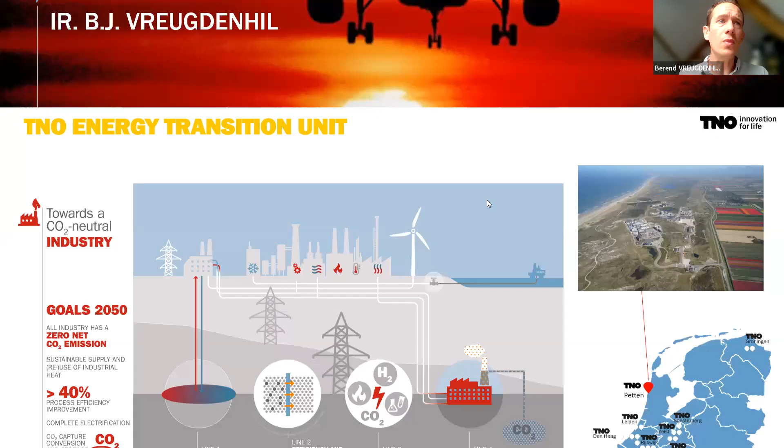One slide about TNO. TNO is a very large research organization, the largest in the Netherlands, focusing on many topics.

My group is part of the energy transition unit, where we focus on a CO2 neutral industry via various lines within my group, which is located in Petten.

Within the flower fields, we focus on using biomass to replace fossil resources. And this can be in the form of heat, fuels, and chemicals.

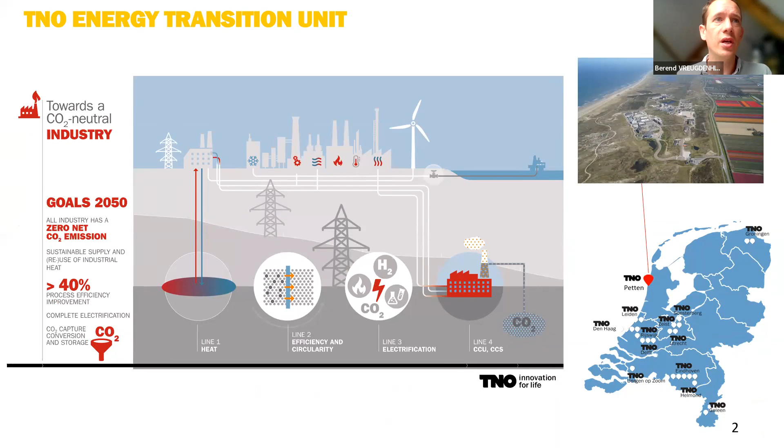So, as I said, the topic of today is gasification towards Fischer Tropsch. Gasification is, I believe, a workhorse for the energy transition.

IEA Bioenergy published a report end of last year where we investigated how gasification can be applied in existing infrastructures, so existing industries, to convert them into biorefineries, utilizing their own waste streams and co-producing additional products.

One of the proposed pathways there is a Fischer Tropsch pathway. It's a key technology in utilizing all kinds of undervalued resources.

From agricultural waste and forest residues to municipal solid waste and even to plastics, it can be applied in many different industries: power generation, refinery, steel making, but also for fuels and chemicals.

We believe that gasification is a crucial technology in reaching large shares of green gas in the European gas infrastructure, which is really a hot topic today.

As a technology, it can also be deployed for developing the bioeconomy, where you focus on using biomass to produce fuels, chemicals, energy, but also the circular economy.

When you talk about municipal solid waste, you take in plastics, and gasification allows you to convert plastics back into the building blocks of plastics, so you can make virgin plastics again.

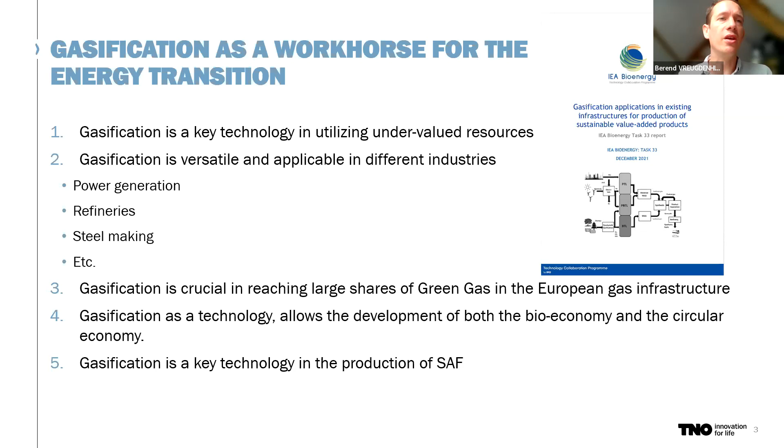Making all these sectors renewable or sustainable presents a huge challenge, especially in hard-to-abate sectors like aviation. It's very difficult to supply SAF in substantial quantities.

They evaluated the various routes and compared biomass pathways to power-to-X, using renewable energy, and compared it to fossil-based products. It's a very nice report, but what it states is...

E-based systems tend to be 2.5 times more expensive compared to bio-based routes.

So making all these products from power-to-X is going to be very costly, and the sustainable electricity is not yet there. That's a huge challenge.

It also mentioned that if you want to make renewable kerosene via the power-to-jet pathway, you would require 1,010 terawatt hours by 2050 and 143 million tons of CO2, which is also a substantial amount.

The good thing is, in biomass, you have both a lot of carbon and a lot of hydrogen. So it's an excellent pathway to go to Fischer Tropsch.

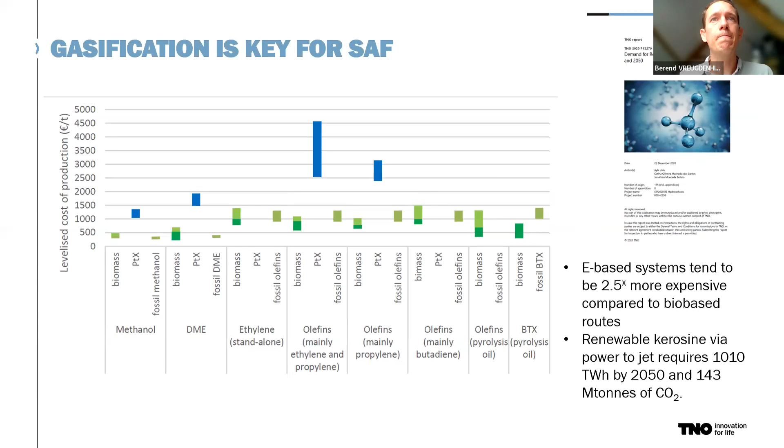So going into the project, what I will be presenting is part of the BECOOL project. It's a collaborative project between the EU and Brazil, ending at the end of this month.

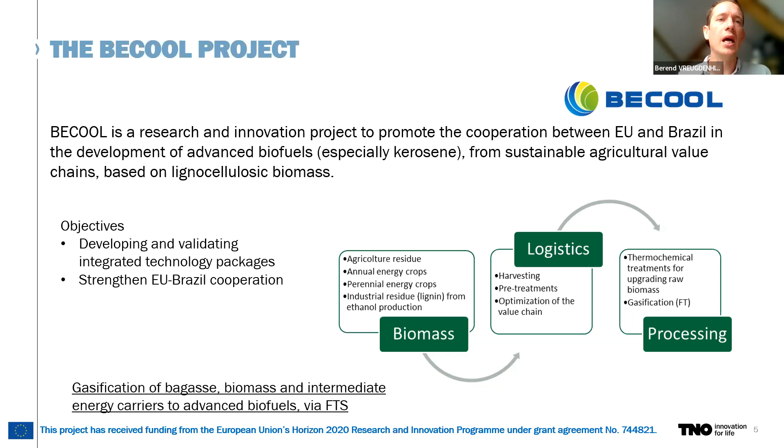Basically what we looked at in this project with all the partners is the growth and cultivation of biomass, the harvesting, the logistics to get the feedstock to a plant, and then the thermochemical conversion via pyrolysis or gasification to go to Fischer Tropsch. We analyzed this with models, but also supported it with actual testing in the fields and in the lab with gasification tests. TNO was part of the group looking into this thermochemical conversion, where we showed that you can convert biomass into Fischer Tropsch products, and the results were used to validate our models.

So what did we do there? We had several routes in the project: pyrolysis producing a liquid, and then high temperature gasification to produce syngas. But at TNO, we have an indirect gasifier, which is more medium temperature gasification, and we focus on utilizing the biomass directly, making a product gas, not a syngas. It's rich in tar and methane.

After removal of impurities with tar removal or a water wash and hydrodesulfurization, we would go to a steam methane reformer to make syngas out of the product gas, remove the CO2, and go to Fischer Tropsch where we produce the liquids. The economics, as calculated by IEA back in 2019, would be between 21 to 40 euros per gigajoule. And our approach reached the high end of that specific range, and that's without any learnings so far.

Looking into the mass and energy balance, the overall efficiency is about 45%, and the carbon conversion is 34%. This is quite typical for Fischer Tropsch processes.

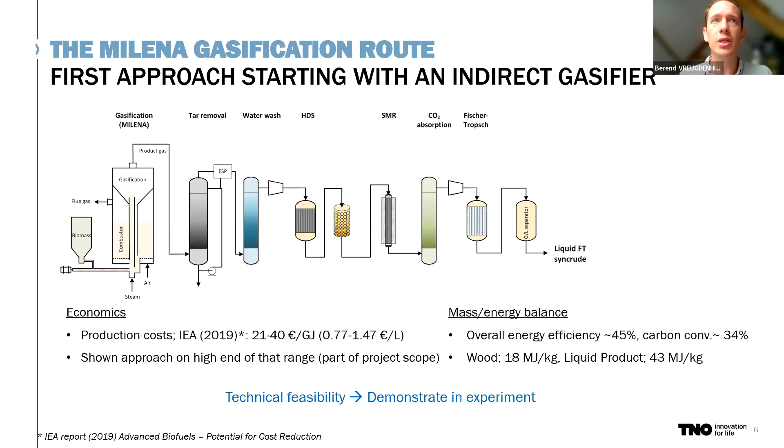So what we did is we demonstrated with experimental work that it's feasible, that it's possible to do this, and it's actually quite unique. I'll show you the lineup that we have. Part of it was existing equipment, so the gasification and the gas cleaning and part of the gas upgrading, but everything from the steam methane reformer onward

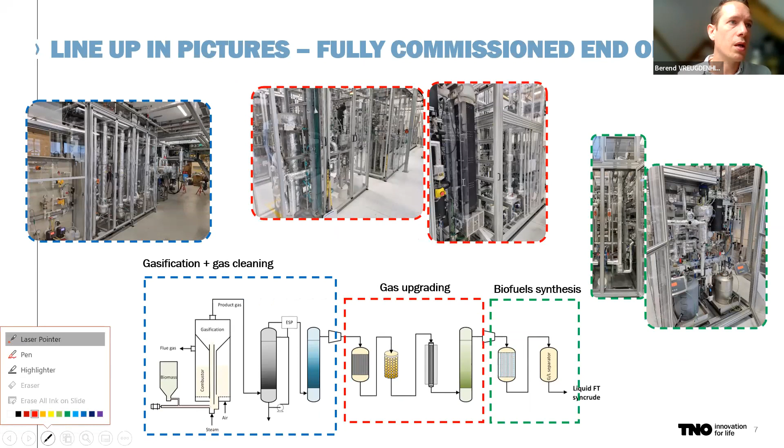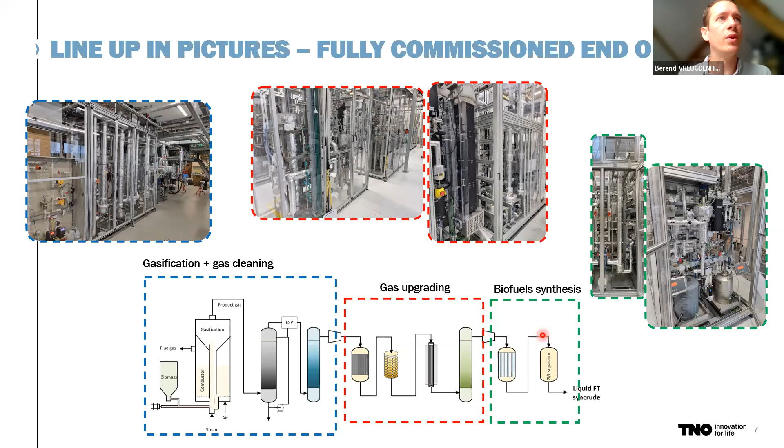from this point forward, the CO2 scrubber and the high pressure fuel synthesis, that was all newly built and fully commissioned by the end of 2021. So it wasn't tested before. Within the BECOOL project, we actually had 2 weeks of running an experiment to demonstrate this.

With quite a big team of people, we gasified first beechwood, which is our standard starting point. We operated the gasifier, and in the meantime prepared the upgrading, so the cleaning and the conversion, the steam methane reforming, CO2 scrubber, in order to get a syngas of good enough quality. At the same time, we were starting up our fuel synthesis part with gas from the grid, and eventually connected it to our gasifier, so on bio-syngas, and demonstrated the feasibility.

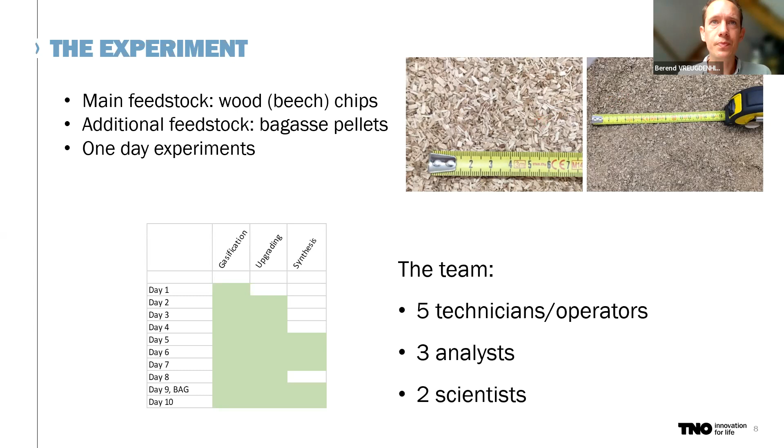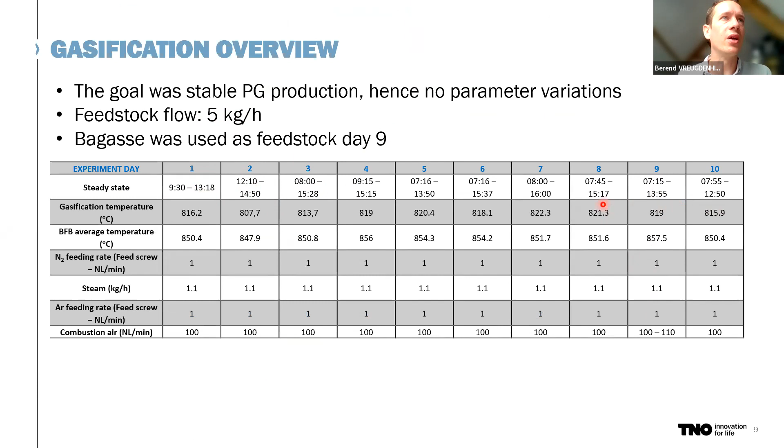Here you have an overview of what we were doing. You see some days were longer, some days were shorter. Sometimes you run into problems and you have to solve those. Typically, every day we operated on 5 kilograms per hour, and on the 9th day we ran on bagasse pellets. Our gasification temperature is roughly around 820 degrees C, and we tried to keep everything constant for the duration of the 2 weeks.

So this is some of the results on gas upgrading. You can see after tar removal, so Milena, Olga, after tar removal, you see a typical gas composition. It's rich in CO, hydrogen roughly 20%, and there's still some toluene and benzene in there, and ethylene is quite high. Then after the gas cleaning, which is the hydrodesulfurization and sulfur removal, what you see happening is all the unsaturated hydrocarbons get saturated, so the ethane content increases.

There's still some benzene and toluene in there, but after the methane reformer, where you make syngas, all these components are destroyed and syngas is produced, after which we remove the CO2 in order to have just the syngas going into the Fischer Tropsch. And you see the CO2 is completely removed in this case.

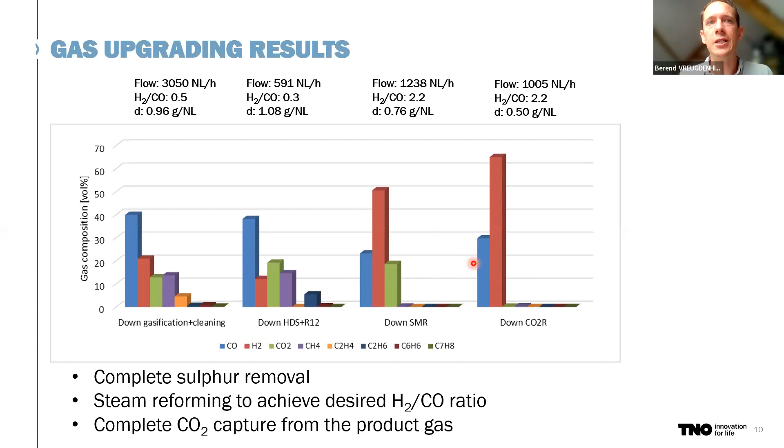Going into the Fischer Tropsch pilot unit, it's a reactor 2.5 meters long with an internal diameter of 26 millimeters. It's externally controlled with thermal oil because of the exothermal reactions taking place.

Roughly 1600 grams per hour of gas was going in, starting with gas from the gas panel, and then later switching to biosyn gas.

You can see at the bottom left the pictures of the Fischer Tropsch catalyst, which is a low temperature cobalt catalyst, and the silicon carbide pellets, which basically form the inerts at the inlet to get a good distribution and heat up of the system. It's also mixed with the catalyst throughout the length of the reactor to mitigate all the exothermal reactions. If you only had catalyst, then you would overheat at one point and probably melt your catalyst straight away.

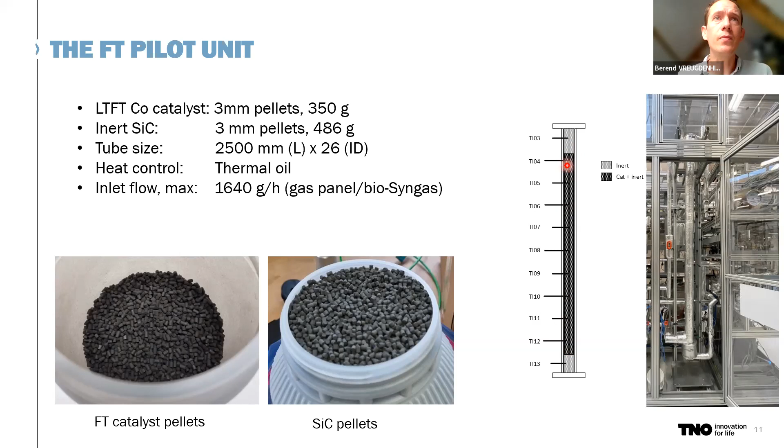Here are some of the results on the 6th day. You see all the thermocouples, and it's going up. When the gas goes in, you see exothermal reactions taking place with these peaks, sometimes very high. This is an effect of a change in gas composition, but also a change in pressure. So every time you increase the pressure to reach your higher process pressure, you see an additional thermal effect because more heat is developed locally with a compressed gas.

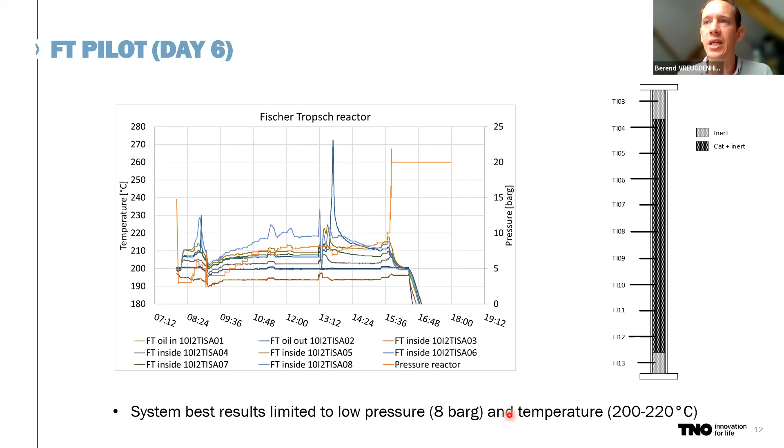So far, what we've seen is that the tests were running best at 8 bar G and roughly 200 to 220 degrees C.

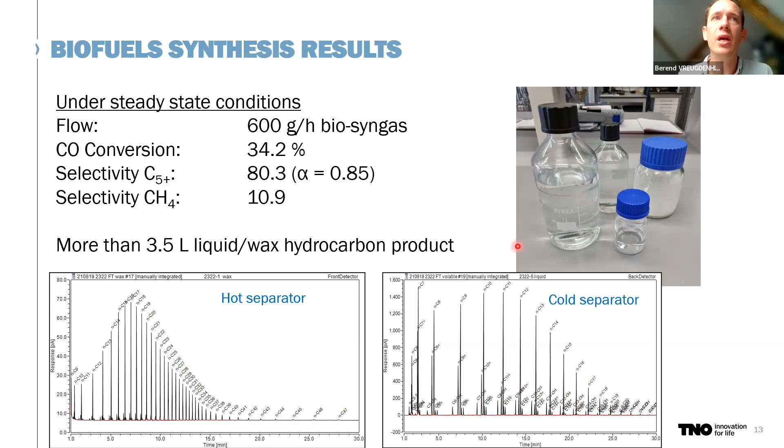And this is a little bit on the results. We produced 3.5 liters of liquid/wax hydrocarbons. There was 600 grams per hour of biosyn gas going in, with a typical CO conversion of 34%.

If conversion were higher, you would have a lot more heat developed, and you'd probably need a different reactor type. The selectivity to C5 plus was about 80%, and methane was still quite high, but that's because the catalyst we used had a relatively low alpha.

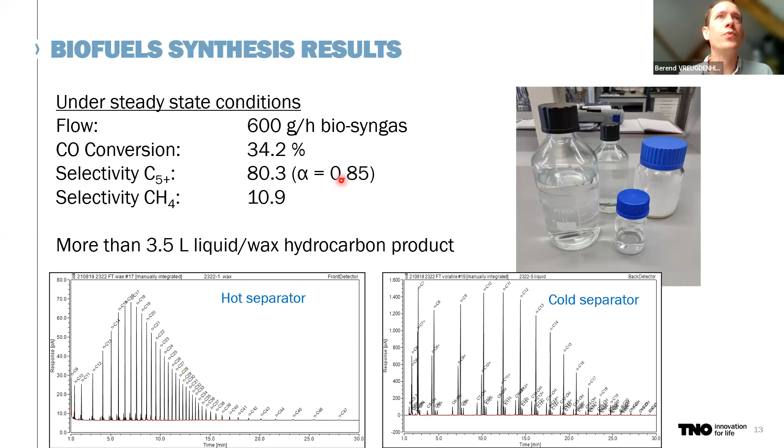So the experience here, what we can conclude, is that technically it has been quite successful running this complex system, with all the units connected for the first time successfully. That was quite an achievement.

We successfully converted beechwood and bagasse. We've shown that the gas cleaning is cleaning the gas to below ppm levels, down to ppb levels. That might still not be sufficient for Fischer Tropsch, but that's part of ongoing research.

We've also seen that the steam reforming was capable of reaching the right hydrogen to CO ratio, which was a question we had because we did not include a shift reactor in our lineup. So we had to do it in the steam methane reformer by controlling temperature and adding steam.

We've seen the conversion there to be over 99% for methane, which typically means all the other hydrocarbons are also destroyed. The CO2 removal was actually perhaps a little bit too good, going to below 0.1 volume percent. And we produced a nice amount of Fischer Tropsch liquids and waxes in those 2 weeks.

So the learnings from this test: what we've seen is that the CO2 scrubber is over-designed, because it's basically a 2-column setup, and already in the first column the CO2 was removed.

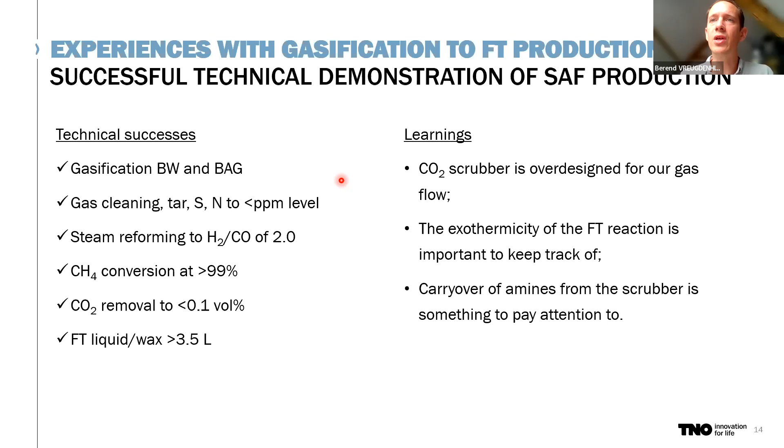We've also seen that the exothermal reactions taking place in the Fischer Tropsch are quite tricky to keep in balance. And we've noticed there is a carryover of amines in certain cases from the amine scrubber where we remove the CO2, and that's something to pay attention to, because it will definitely destroy the Fischer Tropsch catalyst if you do not deal with it.